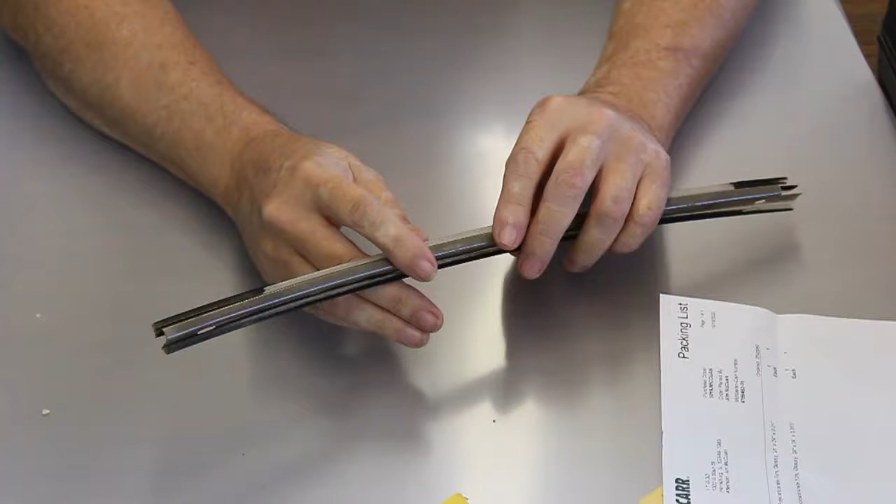We're going to try to reproduce this part. It's an automotive part for 1968 to 1970 era Chrysler, Plymouth, Dodge products. So this is a 50-year-old part, which is no longer in production, obviously. And the repops are substandard quality, and everybody complains they're hard to install, they're brittle, and a lot of other things. So we're going to try to reproduce this.

On closer inspection, you can see this black coating that's put on it. It's kind of a fuzzy coating, like a material. It's called flocking. It's a treatment used on the interior of that period on glove boxes and dashboards. It's kind of got a suede type appearance to it.

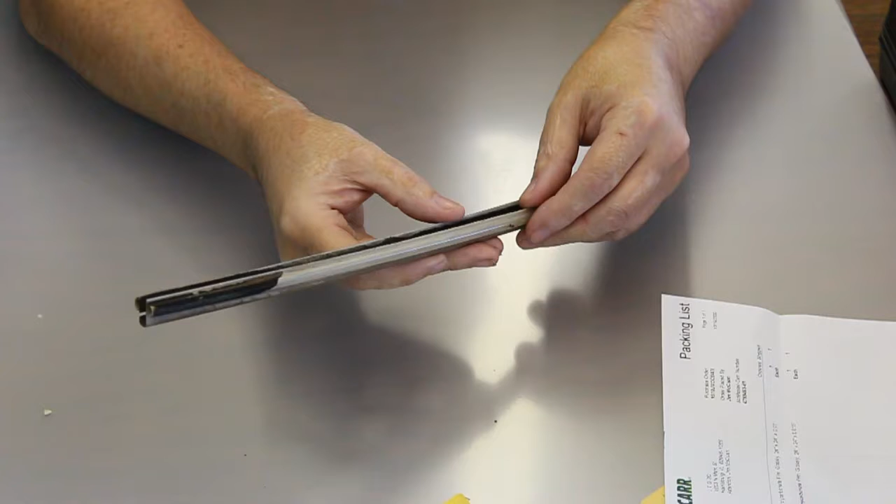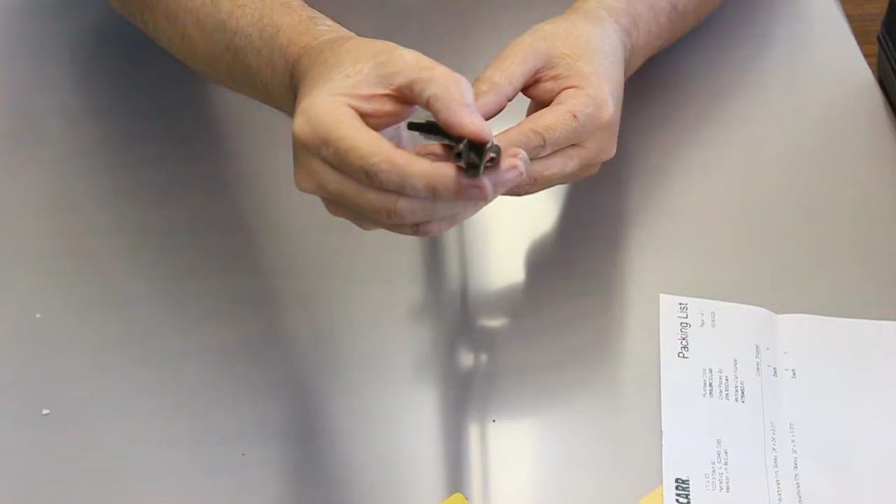This is a window channel for the front of the driver and passenger side windows as they roll up and down in this deep channel here. You can see this is pretty dilapidated and it's just falling apart, and obviously that's why they want to replace it.

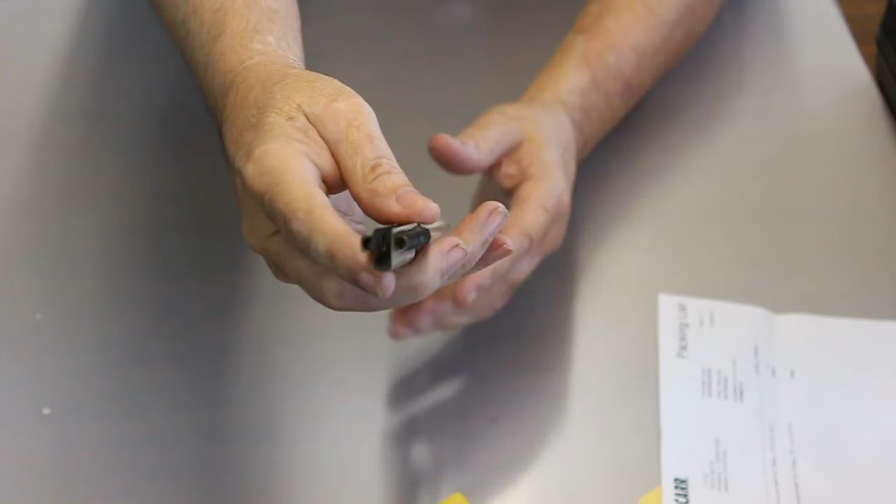At any rate, we have narrowed down the material, and we're going to reproduce it as a polycarbonate sheet, which we'll cut into strips. To get the form that this carries, you can see it's a rather complex shape. It starts in here, comes out, up, over, up again, then reverses itself 180 degrees and then back over to form the other side.

So there's not much room in here to form with, because what you normally think of when you see all these 90 and 180 degree turns is a press brake. But to get the tooling in and out of this area and this deep slot, a press brake is going to be very difficult and require some pretty specialized tooling, if you can do it at all.

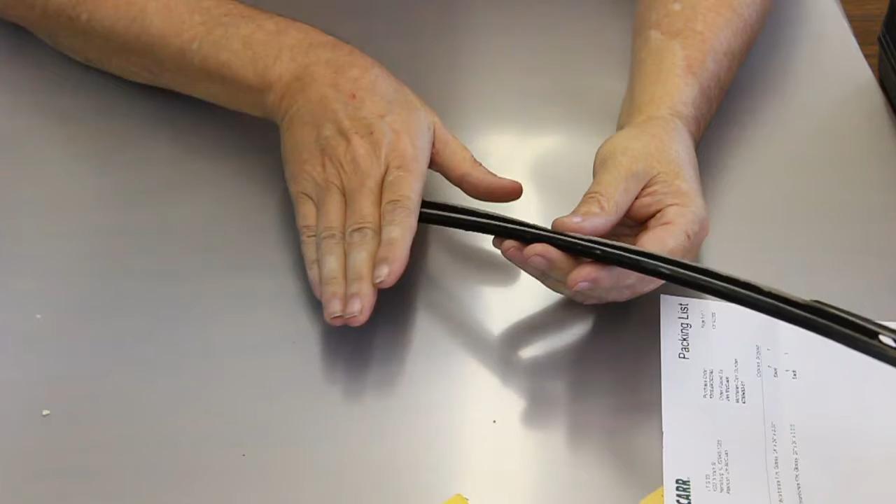What we're going to try to do is called roll forming. Roll forming basically takes this strip, a wide flat sheet, and sends it through a series of rollers to come out with this net shape at the end. So from this we'll go into Fusion 360, and I'll show you a little more of what I'm talking about in terms of the roll flower and the roll form.

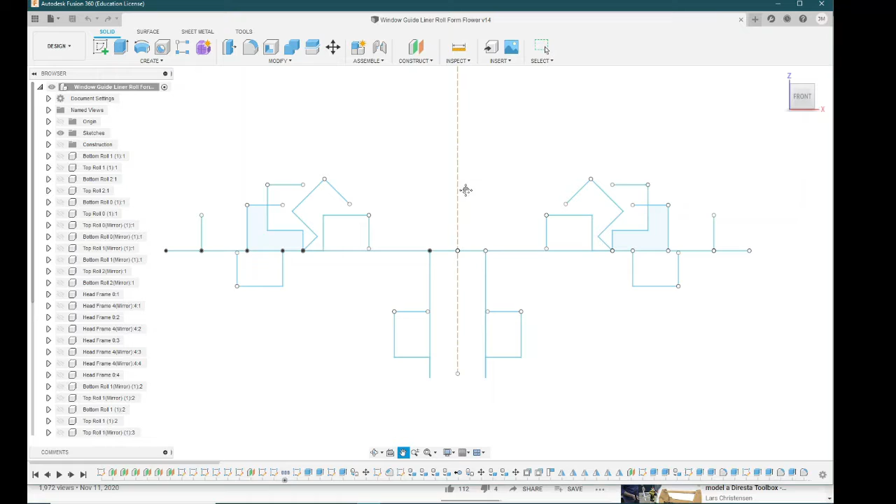Okay, so this is what's known as a roll flower. It's basically all the positions that the flat material will be molded into as it passes through the rolls. To make this easier to follow, I've broken it out into individual steps. The first thing you'll see is a straight line with dots indicating where the joints are going to be. The first roller basically just guides everything straight into the roll mill.

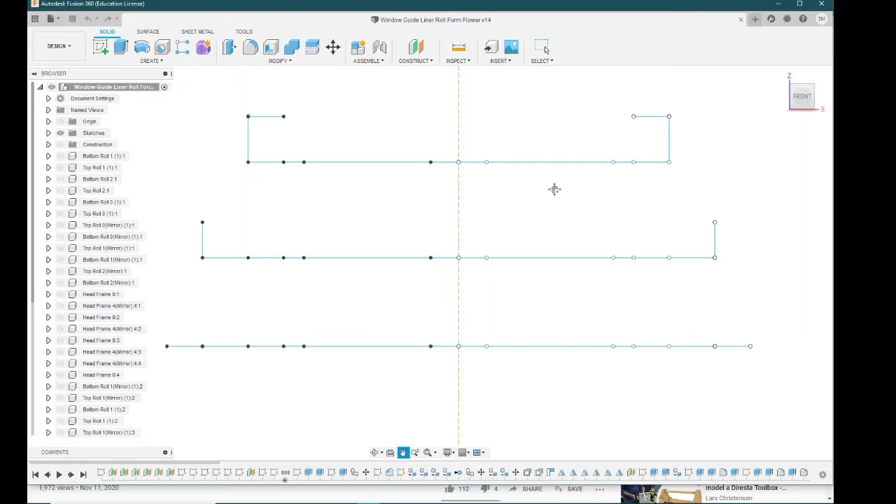The first operation in the roll mill is to bend 90 degrees on the outside edge of the material. The second step is to make the next 90 degree bend. Then the third step will flip that down 90 degrees on each side. The next step will be to flip this section here back up 90 degrees.

And then we're going to flip this over. This is a transition move. I didn't put the transition moves in the others, but basically everything that's a 90 will go to a 45 first, and then through the roll that makes the 90 degree bend. So here you see the 45 degree bend, and there's the 90 degree bend that brings it back over.

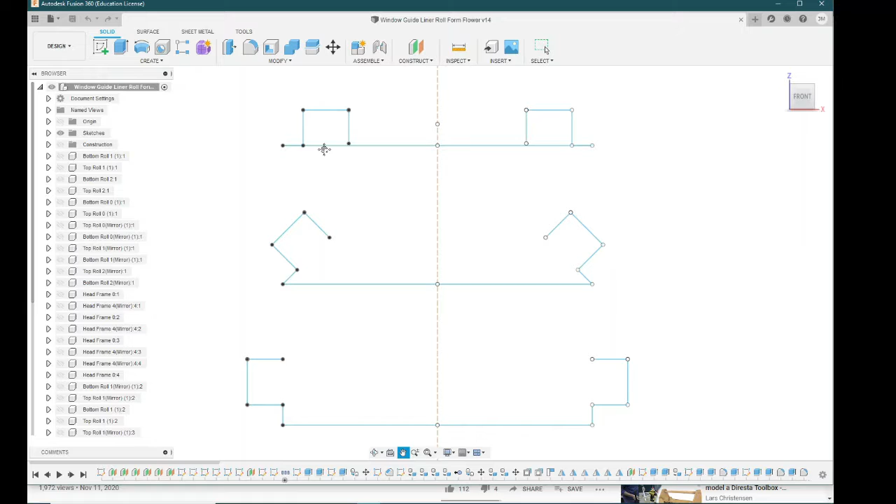The final bend is the one in the dead center of the material to make the U channel that the window goes up and down in. So basically everything on this side, down, over, up, over to the center, and back down around the other side will be the black flocking.

And the side that's outside, here, and then inside this, will be untreated material with no flocking on it. So from here we go to designing our individual rolls.

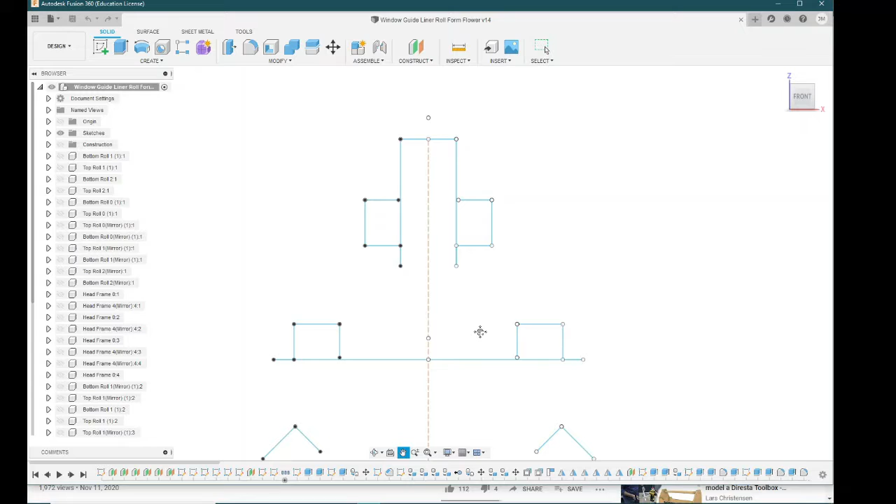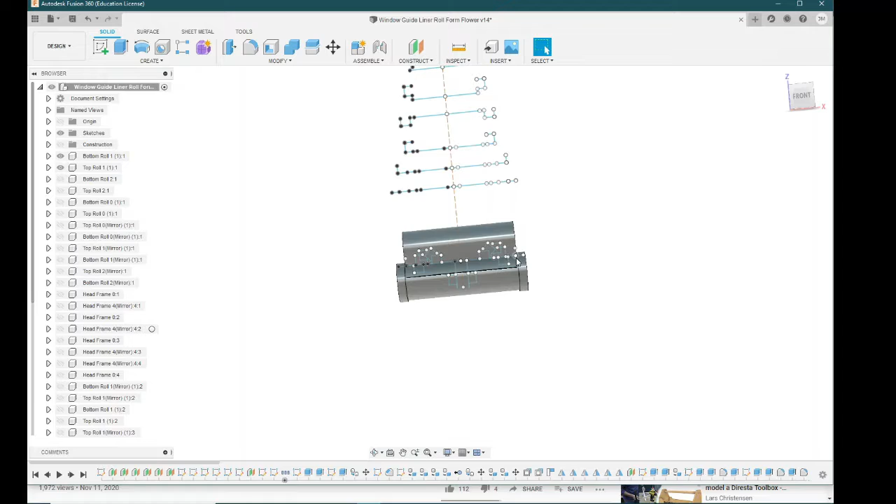Okay, so what you see here are the rollers, and this particular roller is the 90-degree roller for that first bend. And you can see here, you've got a flange that comes up, you've got the roller that goes down in between, which the material, already having been at 45 degrees, will go in that section there and be bent to a 90-degree roll. That's the first one. And so we have to have some way to support this.

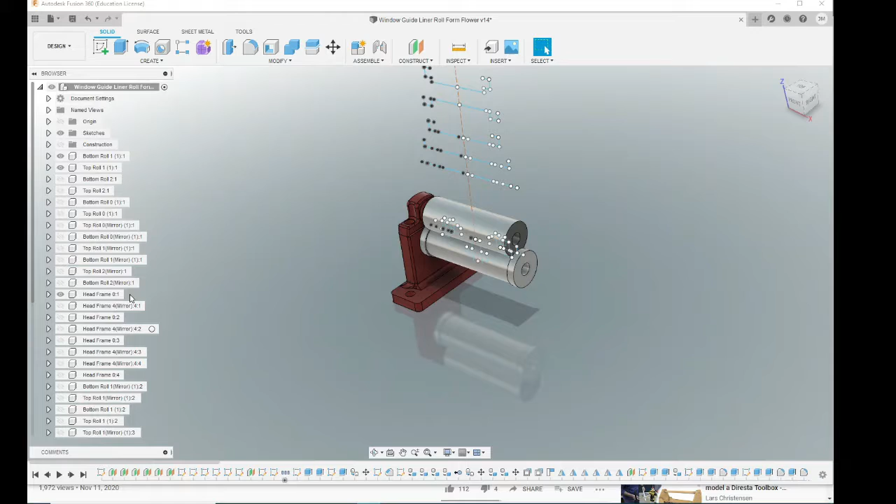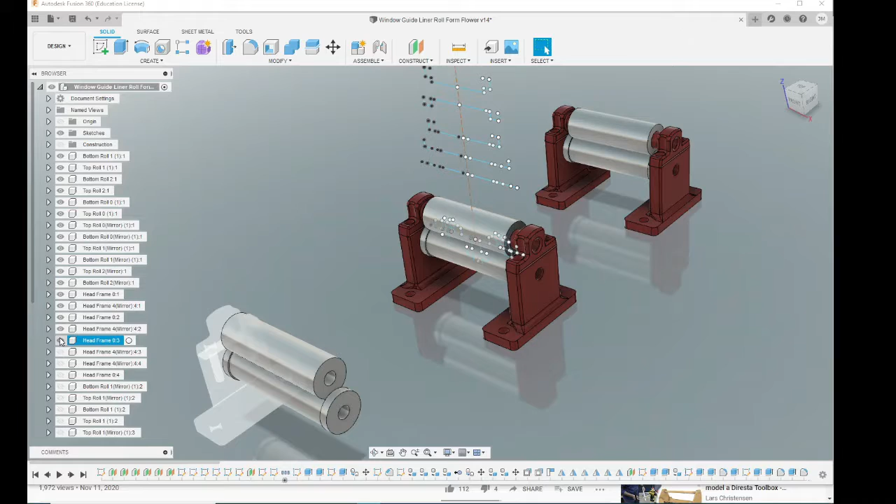And so what we end up with looks something like this. And of course, all this is mounted to a base. And so what you end up with is a series of rollers, the first one guiding it, the second one making a 45, the next one making a 90, the next one making a 45, the next one making a 90, all the way out through until we finish up all these bends.

Now, we're going to have to get kind of creative on some of this because it's not going to be able to use a top roller, bottom roller. It's going to have some side rollers and some things like that. So we'll bring you back to the Fusion 360 model when we get to that point. But for now, it's off to the 3D printer.

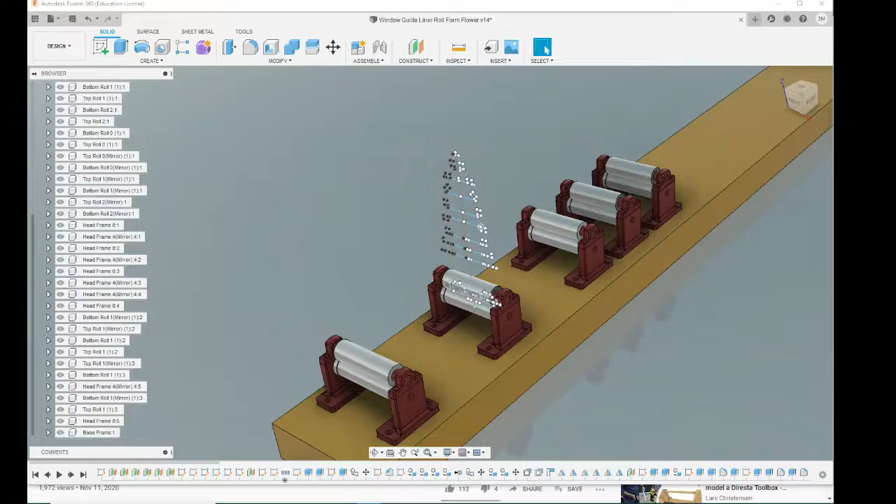So as you can see, we're back from the 3D printer, and we've finished our parts. There are basically a series of parts. You have the frame stand, which looks like this. You have the head frame, or the top of the frame, which looks like this. And you have the rollers, top and bottom rollers, each width and shape of the bottom roller determined by which bend you're trying to form.

So let's talk about the design of these a little bit. Now that you can see, because the part is 3D printed, I've placed fillets in these areas where the side of the tower comes down to the base, and it's filleted all the way around. When we produce this in metal, we'll eliminate those fillets. They're needed because of the way the layers are formed in the 3D print. It gives it a stronger attachment to the base for this side to have these fillets on here.

It's just a wider area and a smoother transition so you don't get stresses that snap this part off right at the base. As you can see, it has two holes for mounting it down to the base. It has a hole for the axle for the roller. It has two threaded holes up here to receive the bolts that will hold down the head frame.

The head frame is radiused here where it comes up and over here where it comes up to be able to get the screws in and out that hold it down to the base. It also has an axle hole through the center, and for aesthetic purposes we rounded it off at the top and rounded the edges. The rollers, the top roller in this case, and in most cases, is a simple flat roller with no detail on it. The only important thing is the OD and the ID.

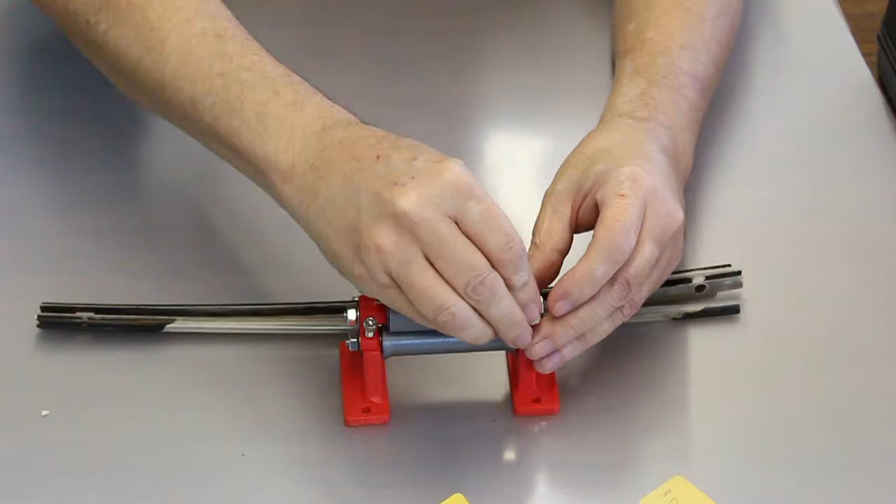Now, we've made these rollers slightly oversized, and that allows us to put shims in between these to get exactly the right amount of space between them to grip the material firmly, yet still allow material to pass through. And so those are attached like that. So the next step is to take these and put them on a board, which we're going to use as the base for all of them.

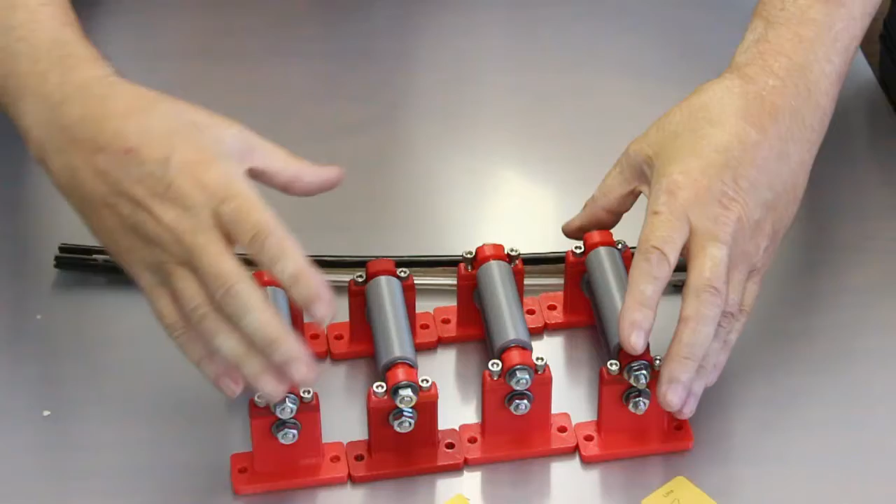And we'll end up with a series of rolls like so. Actually, this one is here and this one is here. So we end up with a series of rolls. In this case, this forms the first bend of our part and prepares it with another 45 for the next bend. And then we'll print more of these as we go down the line to get all of the shapes. So you can see it's going to take quite a few rolls to form this entire part because it's a fairly complex part for roll forming.

And this is an experiment. Hopefully it turns out and this works. We'll bring you back when we get these mounted down, and we will test running a strip through the first bend to see if we in fact get a 90-degree bend on each edge of the strip.

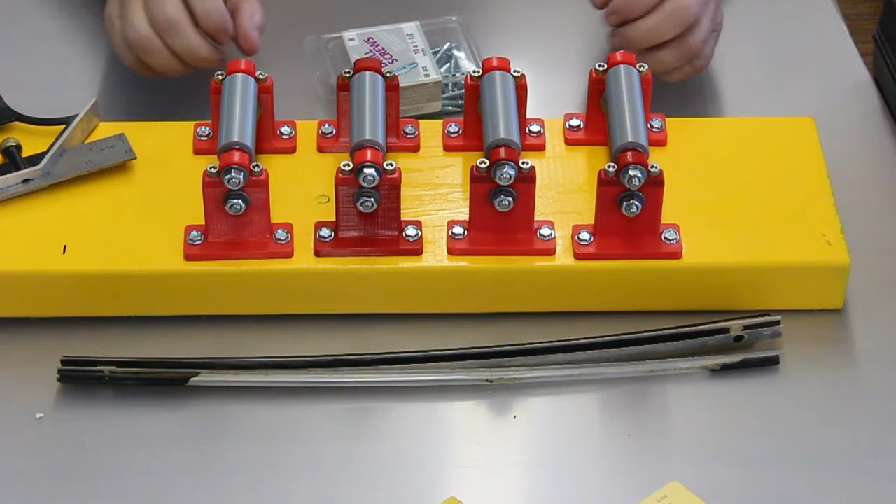Well, we have the frames and rollers assembled and attached to the base. I just used a 2x6, sanded it, painted it yellow for some contrast. The main thing was to get these laid out so that each roller has the same center line and all the frames are square, and it's attached down with these 1.5" number 10 self-drilling, self-tapping screws, and that goes through, lacking about 1/8 of an inch, going all the way through the 2x6 once they're installed in the frames.

Pretty simple, pretty straightforward. Again, the main thing was getting these rolls exactly centered with one another so that it runs straight when you start running a strip through it. Getting off a little bit on 1 or 2 rollers is not that big a deal, but by the time this stretches out, remember now each one of these sets of 3 makes one bend, and in some cases it may take 4 or 5 rollers to get it into the net shape that we want to end up with. So this is going to extend out.

This board is a little over 6 feet long, and hopefully I've left enough room to be able to get all the rolls in. I may be a little short, may have to add some on to the end of it, but we'll see about that when we get there. For now, we will adjourn from this and go into this material we're sitting on here. We'll cut this into strips and apply the flocking. I'll cut it off camera, but we'll apply the flocking on camera so you can see how that process works.

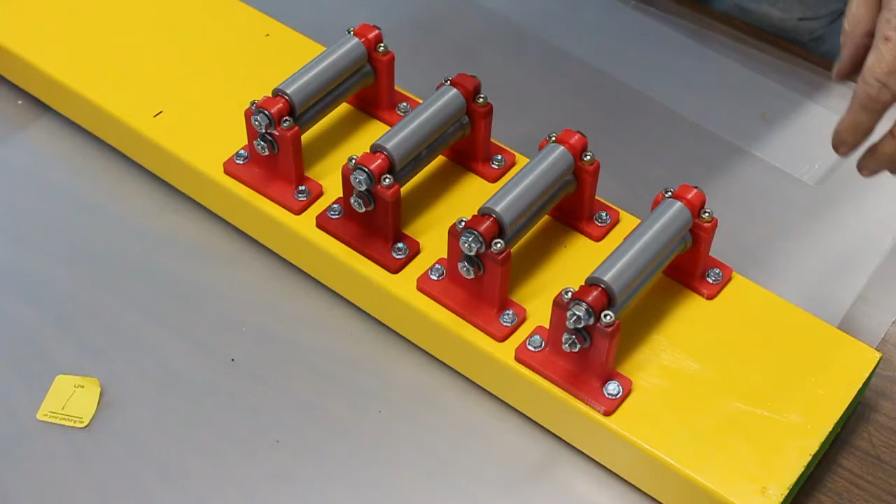All right, we have our rolling mill set up and we're ready to test bend our first strip. We're going to use the 1.5 thousandths thick polycarbonate in this test. And it's pretty flimsy. Hopefully it gains enough rigidity once it's bent to mimic the original part. If not, we've got some thicker material we'll try to run.

My biggest concern is that there is enough clearance between the end of this roller and the edge of this roller at the flange, and there may not be because I didn't allow very much. But essentially, we'll feed this through and, wow, that is tight. May have to shim that a little bit to get that to work.

It'd be much easier if I had the cranks on this. Okay, I don't know if you can see that or not, but we have got a bend here on the 45 section.

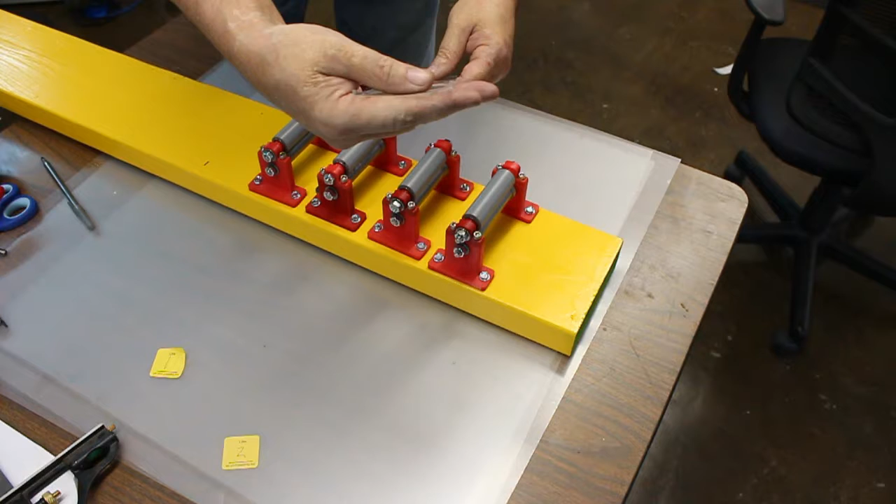There you can see I've gotten a 90 on it just by pinching a little bit. And it has stiffened it up quite a bit. So hopefully we're on the right track and this material works. If not, we've got a thicker material we can run through, and we'll go with that. For now though, we need to design a side roller to pinch in after it comes out of the 90-degree roller and get rid of that spring back.

Okay, when we left off last, we had bent through the first 3 rollers and our 90-degree had some spring back in it, and so we ended up with about a 45-degree net shape. So this is back in Fusion now. We're going to make a roller that is going to overbend that part 45 degrees, and hopefully that'll stand back up and approximate 90 degrees at that point.

If not, we can play with this angle here on this top roller and get it to spring back to come out to 90 degrees like we want. The bottom roller is just a flat roller. The top roller is made up of 3 pieces. It's made up of an end roll on each end, and that has the 45 degrees on it. This over here could have been any degree you wanted. It could have been flat or whatever. I just made it a 45. And then the center roller is just a spacer between the 2 outer rollers to keep them where they belong.

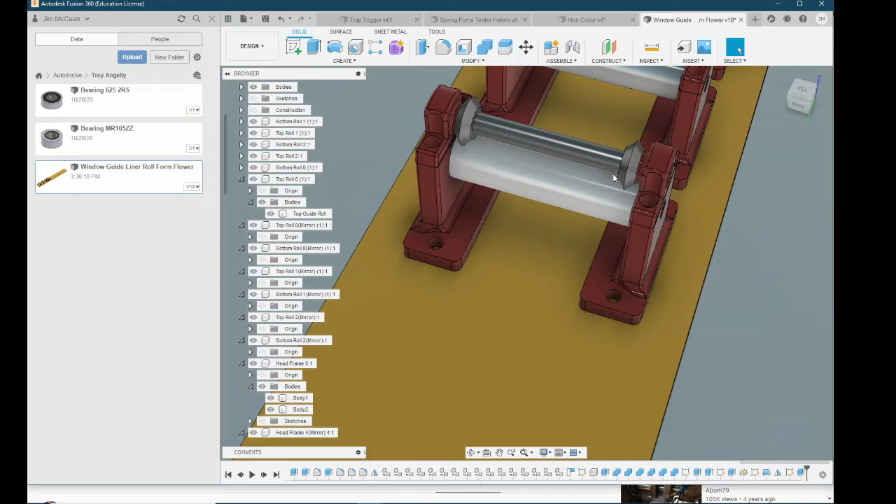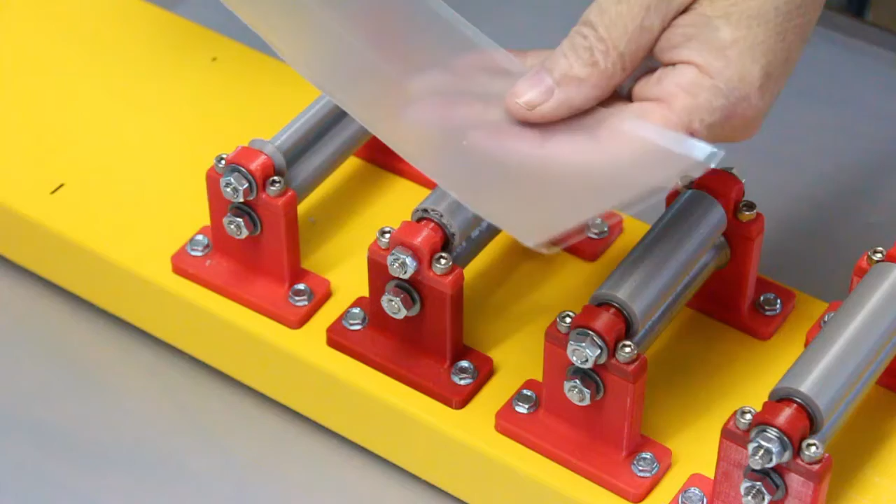All right, this is our strip we ran through before. And remember, we had about a 45-degree bend after the spring back happened. So if I can feed this through here without too much difficulty, it's going to flatten it back out, of course, in the first roller.

Still going to have the problem feeding that I've had. There's the 45 degree. There's the 90-degree bend. And yeah, the overbend is not fitting in there right now. Not sure if I miscalculated my width. There we go.

Okay, so now we're getting about a 45-degree overbend, and we'll run this part through. It is definitely getting the overbend. This side is bending up to 90 just fine. This side, while appearing to be bent the same amount, is not. I see a gap here, so it looks like I'm going to have to shim out this roller on the near side to you.